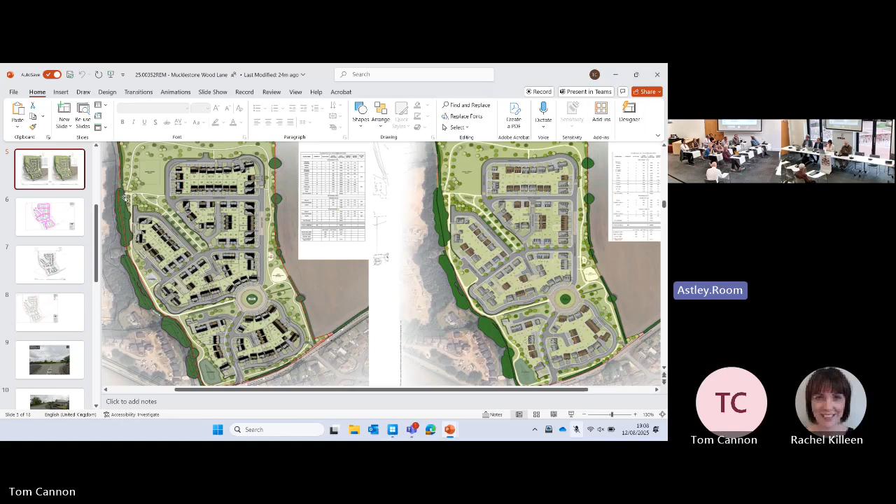When the application was last presented at the July committee meeting where this application was considered, members raised several questions about the refuse strategy and in particular sought clarity on how refuse vehicles would facilitate refuse collection when accessing unadopted roads and needing to manoeuvre around them.

In response to these concerns, and notwithstanding there is no policy conflict, Shropshire Homes have revisited the scheme and revised the road hierarchy and the road adoption plan to increase the extent of adopted road within the site to ensure that refuse and emergency vehicles are able to access almost all properties off an adopted road.

Only 6 homes are accessed off shared driveways. These are plots 32 to 35 and 50 and 51, which represents just 4% of the total dwellings proposed. Refuse collection points are provided for these homes that ensure the distance to the collection point, where the refuse truck will collect the bins, will be less than 30 metres from the home and in line with building control standards.

The road layout is in full compliance with Staffordshire County Council's Highway Design Guide, and we have provided full tracking details for both emergency and refuse collection vehicles using vehicle lengths of 8.68 metres and 10.32 metres respectively to demonstrate these vehicles can fully manoeuvre the road system in the site.

An updated highway plan has been provided to demonstrate the road hierarchy, including major and minor access roads, minor access ways, and mews courts that all meet adoptable standards, with appropriate access and turning capacity for both refuse and emergency service vehicles. We very much hope the additional information we've provided to officers gives members clarity on the points raised at the July meeting.

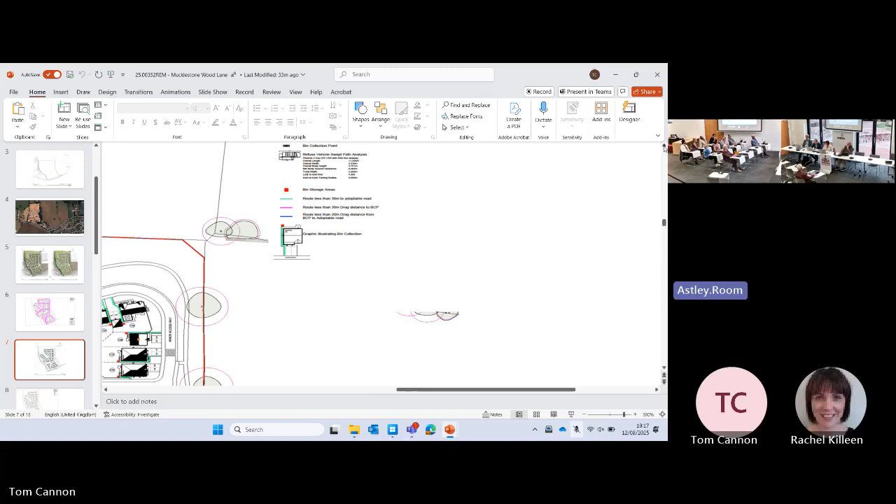I suppose it's achieving a happy medium really between the two. And as I've said, the guidance is up to 25 metres for operatives, so it's not an excessive distance because it's well within that 25 metres.

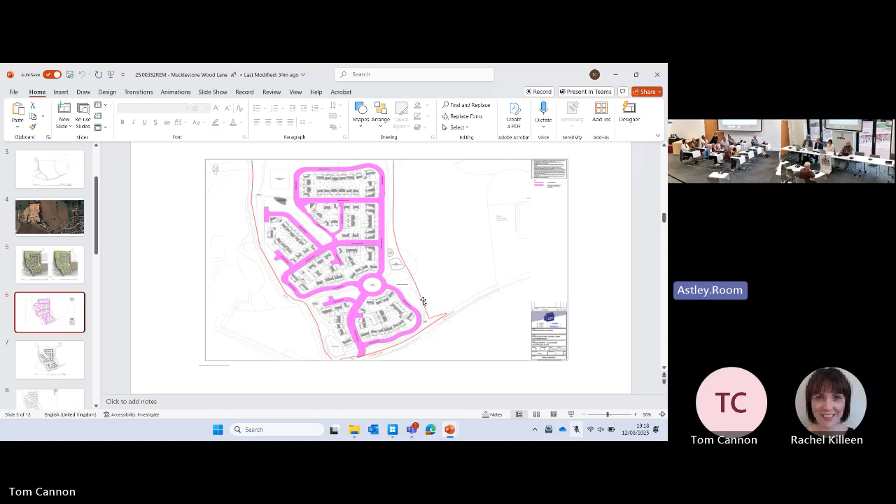As a resident myself and as a councillor for the Westlands ward, we are a people of long driveways, some of us, and in my view some of our driveways are longer than the distances we're referring to here. And I think, again, from the plan that was previously in front of us, the expectation is that residents are going to store their bins at the rear of those properties. You can see there is a red square indicating where the purple line starts, and I think it's right to say the 30 metres is being measured from that storage point.

In practice, I am aware that a lot of residents will perhaps not store their bins at the back, but perhaps at the side of their property, so they will have an even smaller distance to go. Other members may want to raise comments about other items, other issues related to the report, but I'm conscious that nobody has done so.

I think the issue that I have is the same issue that the representations received from members of the public on this application have, and very sadly, it is not something that's within our power to change. The key objection to this housing estate is that people don't want it. It is unnecessary new housing, overdevelopment in the village of Loggerheads. We are powerless at this meeting to object to the principle of the development.

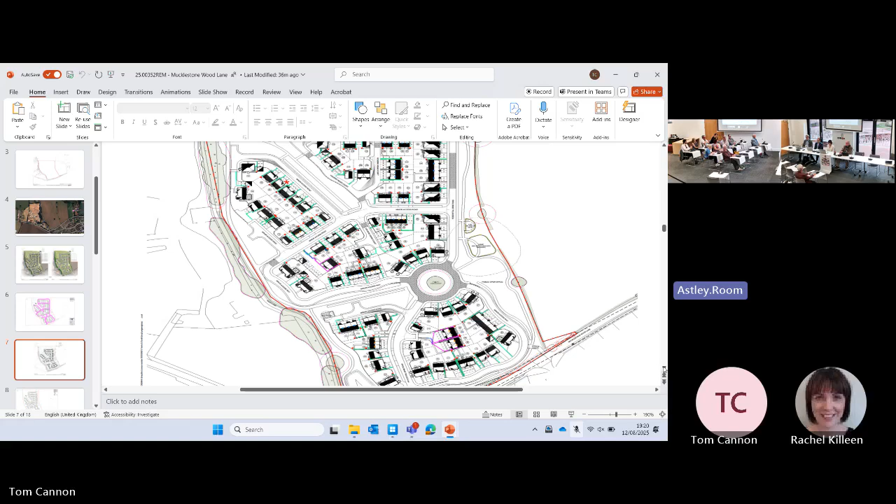That has been granted on appeal, and it's not therefore something that we can turn down. I respect what Councillor Hutchison said, but I feel that if we were to refuse this on the basis of long bin drag distances, that would be indefensible on appeal, because the distances are well within the limits imposed by our policy and by statute.

So I am minded to approve this reserved matters application. The concerns that were raised at the last meeting do seem to me to be satisfied. While I agree with objectors to the scheme that this is not an application we would wish to see come forward, at this stage I can see no valid reasons why we should turn it down. For that reason, I am minded to vote approve. Thank you, Chair.

Thank you, Councillor Holland. I must admit I tend to agree with your comments there, 100%. Is there any other councillor wishing to speak on this?

So we've had it formally proposed from Councillor Holland. We haven't, but with reluctance, I will move it. Move the recommendations as printed, Councillor Holland. And from the chair, I will second that. Do we see any other counter proposals? I see none, so in that case it's been formally proposed and seconded.

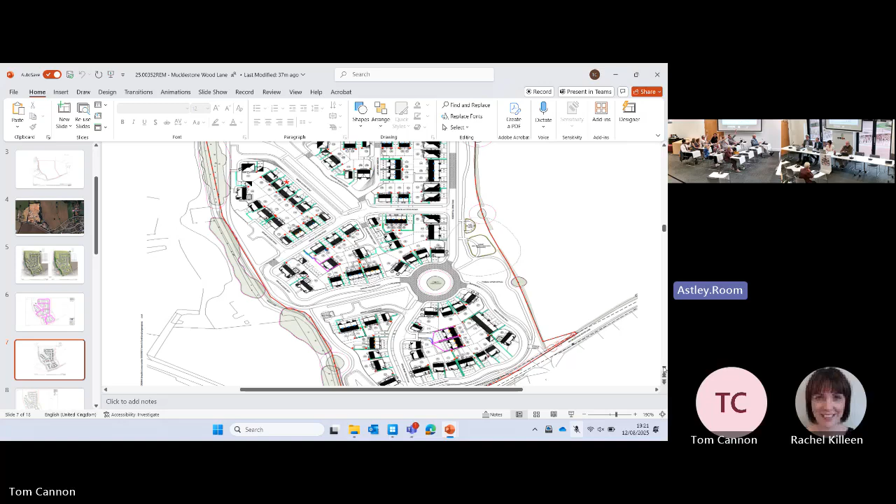Can I see a show of hands in support of that, please? Against? That's unanimous. That item is clearly passed. Thank you very much, councillors.

Brings us on to the second application, item 5, to be found on page 21 to 26 of your agenda pack. Application for major development, Morston House, the Midway. Over to you.

Thank you, Chair. Members will recall planning permission was granted earlier this year for the change of use and side extension to Morston House, shown here edged in red, at the junction of Church Street, the Midway and Lower Street, to provide students-only living accommodation in the form of 126 studios. Permission is now sought for the variation of conditions 2 and 9 of that planning permission to seek approval for amendments to the approved plans. Condition 2 lists all the approved plans, and condition 9 requires the works to be carried out in accordance with certain plans and documents relating to landscape and tree matters.

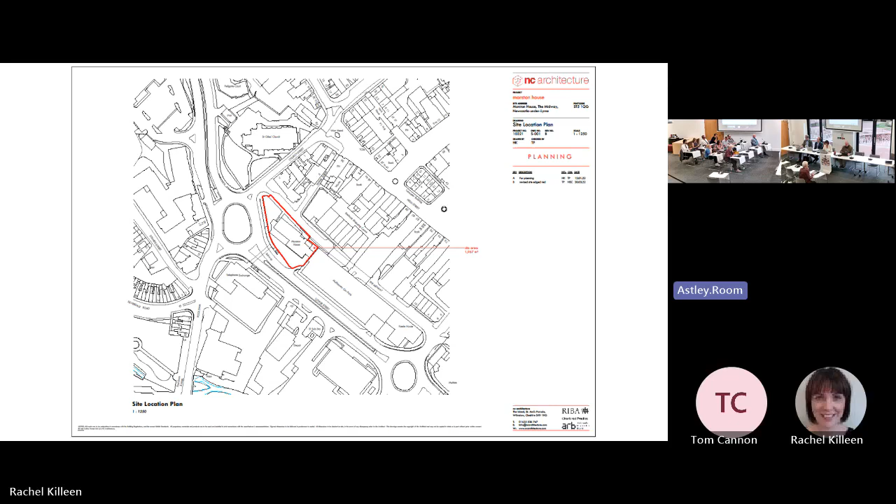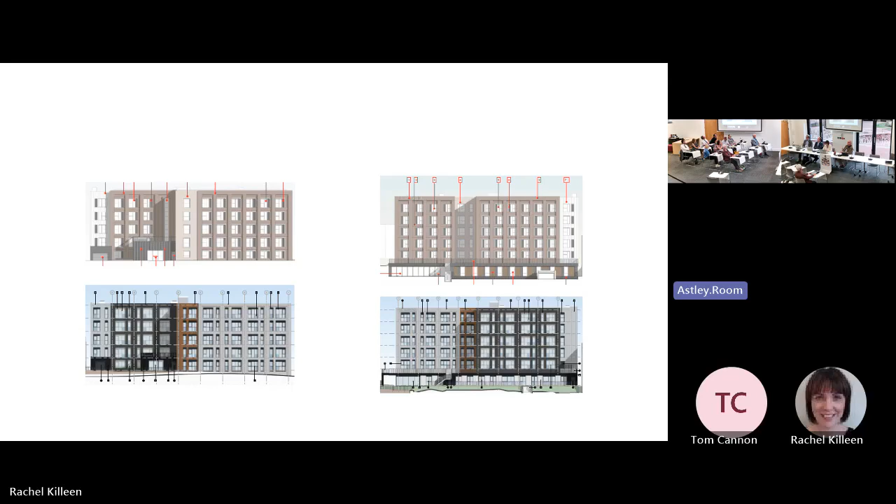So this shows the approved scheme. You can see at the top there the nature of the windows proposed, and then here the revised proposal.

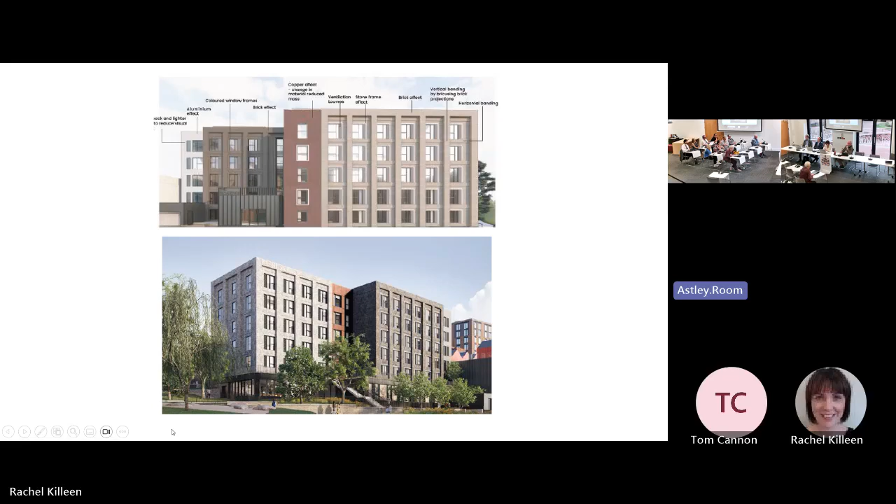On the approved scheme, looking at materials, the building was to be finished in brick slip cladding, with the new side extension, just here on the far left of the screen, finished in metal effect cladding with a vertical section in the centre of copper effect cladding, and on the Lower Street elevation, on the lower ground floor, timber cladding. The amended proposal would be very similar, still clad in brick slips and metal panelling with copper cladding for that central element.

But the lower section here now, which you can see on that image, will now be clad in the light colour cladding rather than timber. The reasoning for that is that it's considered to be a more robust product.

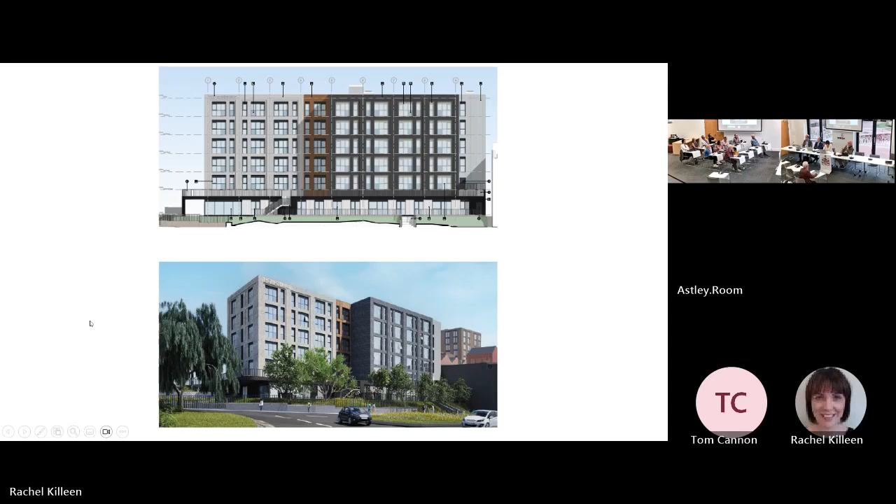The bricks are still to be two different colours of grey, one much darker than the other. You'll see within the report that your officers' view is we actually have a preference for these warmer tones of grey that were proposed in the original scheme. But we're proposing a condition that requires the exact details of the materials to be agreed, so we can look at that as part of that condition application.

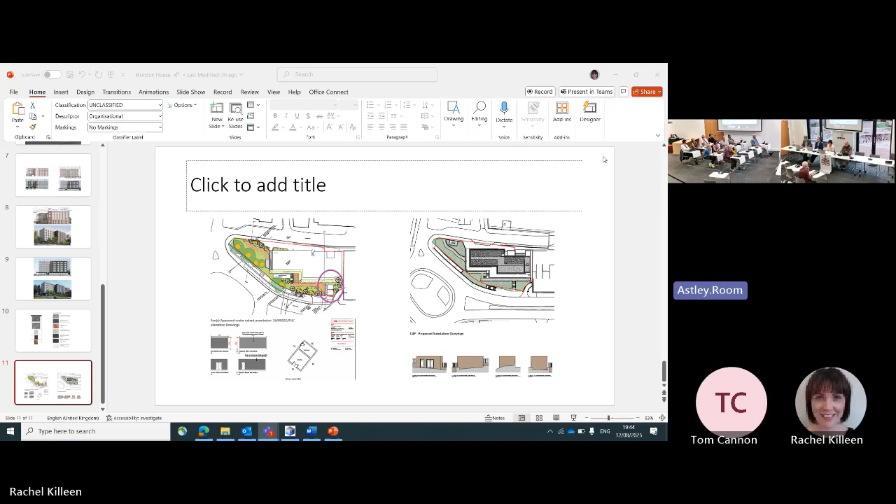Thank you, Councillor Holland. In the absence of any other comments, I'll take that proposal as moved. Do we have a seconder for Councillor Holland?

Just to come back to the materials, so the developer comes back and says well they can't - how does that leave us then? Are we just recommending that they do brickwork around the substation, or material very similar to the building? Is that left to yourself?

I mean, the point of making - I could leave it to the chair and vice chair to make that decision. If members consider it's necessary for that decision to be made through the chair, then yes, we could do that. But ordinarily, it would be for officers to approve the details they consider professionally appropriate.

Thank you for that, Councillor Williams. So we've had it formally proposed. Do I see a seconder? Councillor Bryan: second that, Chair. Thank you very much, it's formally proposed and seconded. Can I see a show of hands please in support of that?

And that's a unanimous response. Thank you very much, councillors. That item is clearly passed.

That brings us on to agenda item 6, and this is Hartshorn Properties Limited, Rosevale Road, Crackley, Newcastle. Over to you guys.

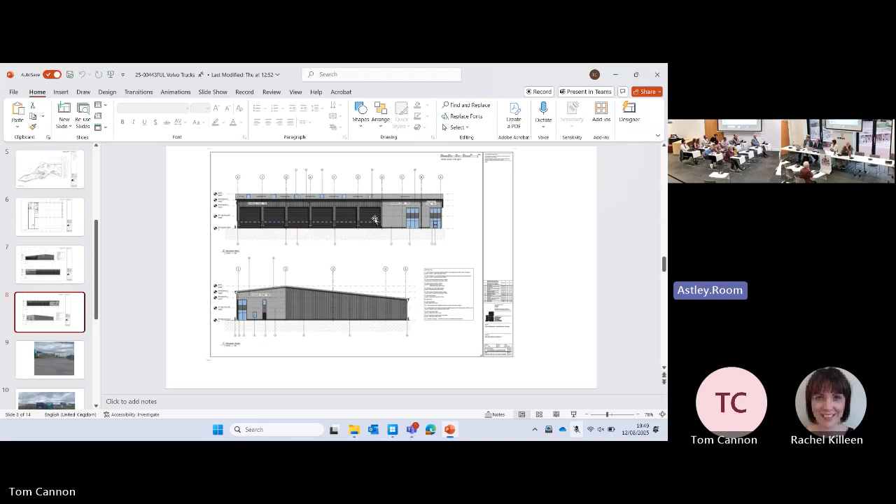So we've got details of the building - it's a conventional size building here, and the refurbished buildings would be of the same colour palette and materials as the new building. In terms of the principles of development, the proposed new and refurbished buildings would provide a more efficient use and a more modern facility for the business, and generate up to 12 new jobs, therefore providing clear economic benefits. So the principle of development is generally considered acceptable by officers.

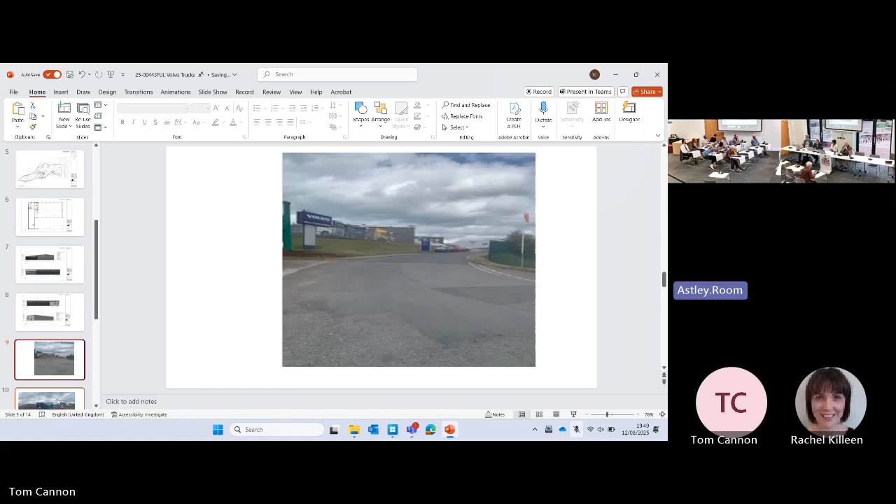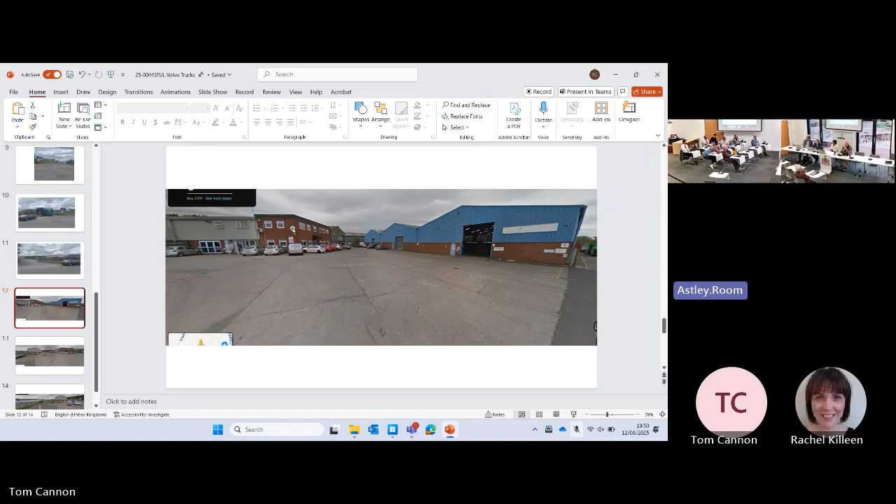The new and refurbished buildings would enhance the appearance of the site by replacing some of the existing buildings, which are quite old structures, as you can see here. They're sort of typical mid-20th century sheds, essentially, with flat roof offices, and their replacement with a more appropriately designed building would be more in keeping with the surrounding industrial units on the industrial estate.

The existing vehicle access would be utilised with a new internal access road and parking areas, as I explained earlier, and the Highway Authority are happy with this arrangement.

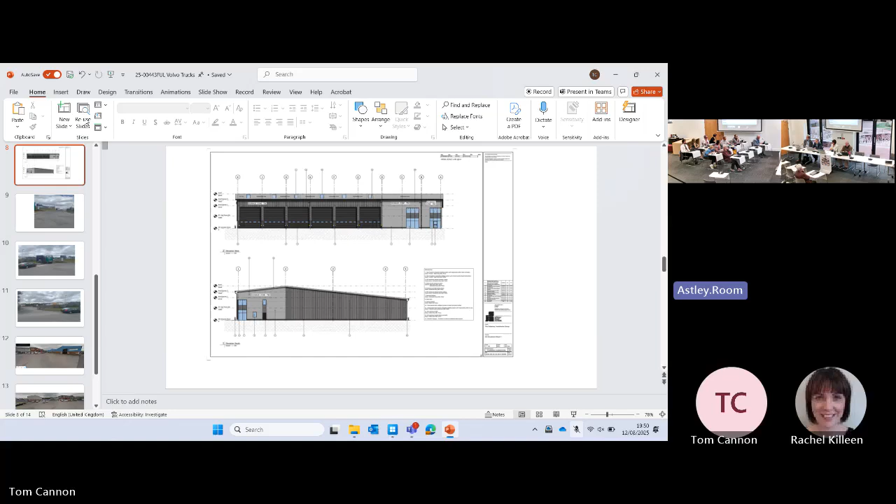Although there are no residential properties within the immediate vicinity of the site, there are properties further to the north, as you can see over here. So the applicants have provided air quality and noise assessment reports, which demonstrate that the development wouldn't adversely impact on these properties, and this is supported in the comments raised by the Environmental Health Officer.

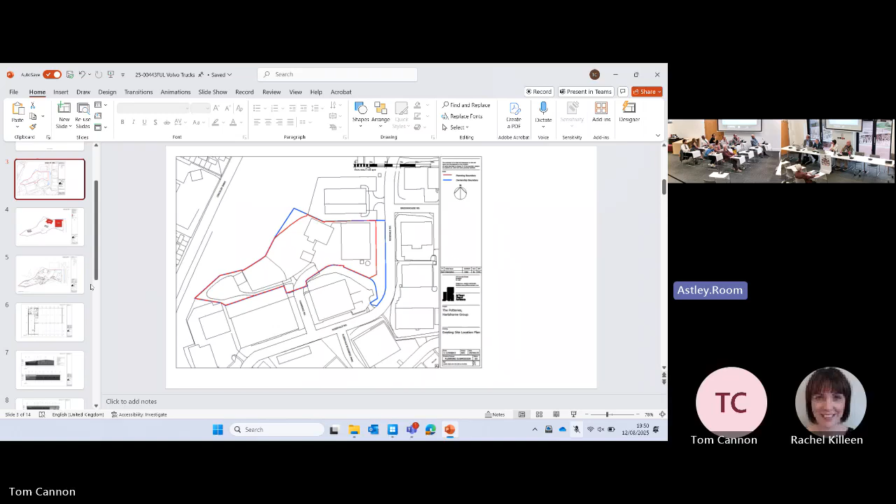In addition, there's some additional landscaping to be provided within the development to ensure that the scheme provides the required 10% increase in biodiversity net gain. Therefore, planning permission is recommended subject to the additional drainage information being provided and agreed with the local flood authority.

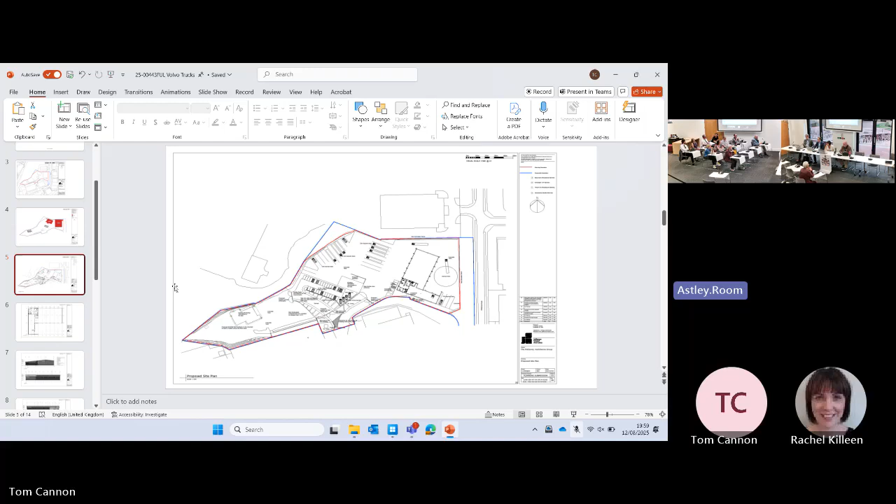So we've had it recommended and proposed by Councillor Holland to move this application. I'm happy from the chair's position to second that proposal. Can I see any counter proposals? In which case we'll take a vote on this then. We've had it formally proposed and seconded that we approve this application subject to the recommendations printed. Can I see a show of hands in support of that, please? And that's unanimous. Thank you very much. That item is clearly passed. Thank you.

That moves us on to item 7 on the agenda, which is one of our old favourites, found on pages 37 to 38, an update on the enforcement case of 5 Bogs Cottage. There's no further update at the moment, Chair, that I'm able to give. You raise my expectations each time that's printed on there, but okay, I take it everybody's read the report. Are we content to keep it on the agenda, coming back in 2 months' time? Can I see a show of hands in support of that, please? And that item is clearly carried.